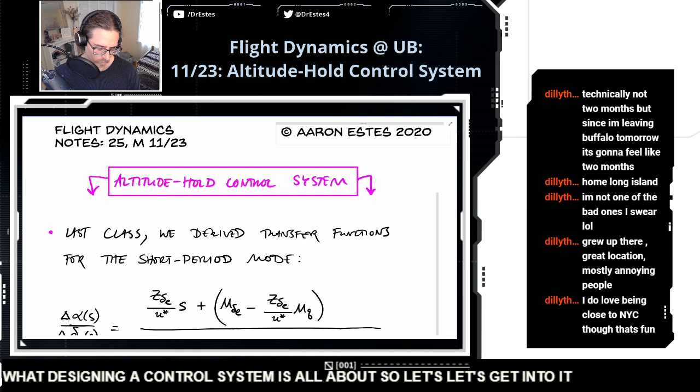So let's get into it. We have some transfer functions for the short period mode that we got last Wednesday. We have a second order model for the short period mode. The short period mode is where the nose is pitching up and down. It damps out very quickly. Even for a Boeing, this mode only lasts 10 seconds when you excite it until it settles out. But it's kind of this annoying mode, the nose pitches up and down. And so, using that model for the short period, you can make some transfer functions that relate.

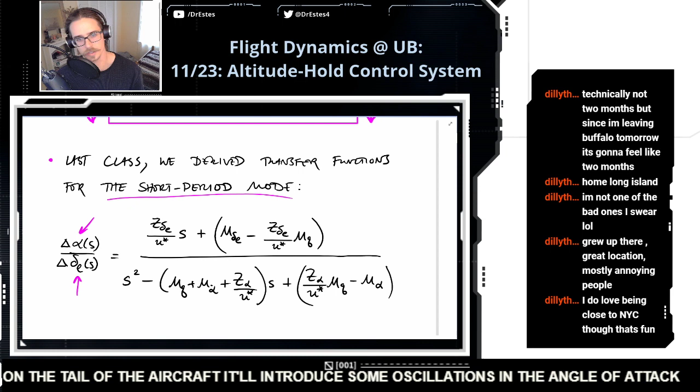Number one, this relates the angle of attack to the elevator angle. So if you perturb that elevator on the tail of the aircraft, it'll introduce some oscillations in the angle of attack. That's what this transfer function is all about.

And there's a second transfer function we get from that model. Q is the pitch rate, so that's just the rate at which our pitch angle changes. And we have a transfer function for that one as well. If you deflect the elevator, it'll introduce some oscillations in your pitch rate.

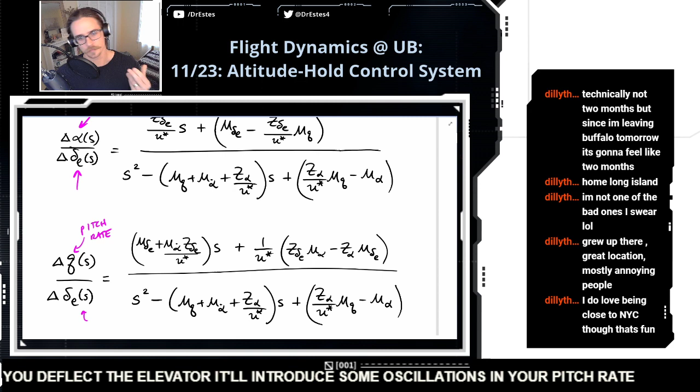Okay, so we are going to use these transfer functions for the controller that we're going to design. So these will be like the backbone, the model for our aircraft.

Okay, so we're going to use these to design an altitude control system. So what is an altitude hold control system? And just from the name, you probably already have a good idea.

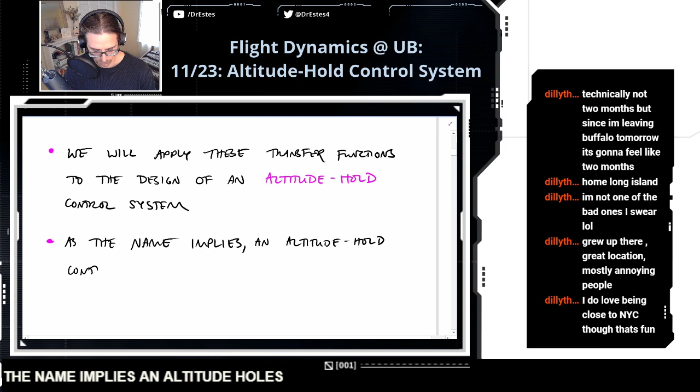Okay, so as the name implies, an altitude hold control system maintains the altitude of an aircraft, despite perturbations from external forces.

All right, so it's like, all right, we want to cruise at 40,000 feet, and then we lock in the altitude hold control system. So, if there's any perturbation, external force, an unexpected gust of wind, this control system is going to automatically bat those perturbations away and maintain the altitude.

Or if you just adjusted the stick and moved the altitude, this control system would move it right back to the set point.

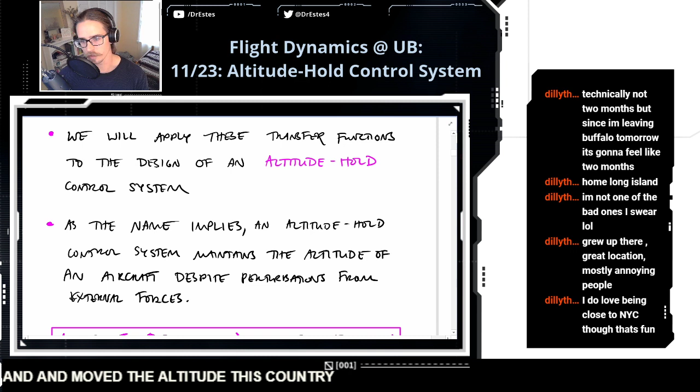Okay, so we're going to make a transfer function for this. So I'll show you what I mean. If we're doing level non-turning flight at constant velocity, so just imagine you're flying straight up in the sky.

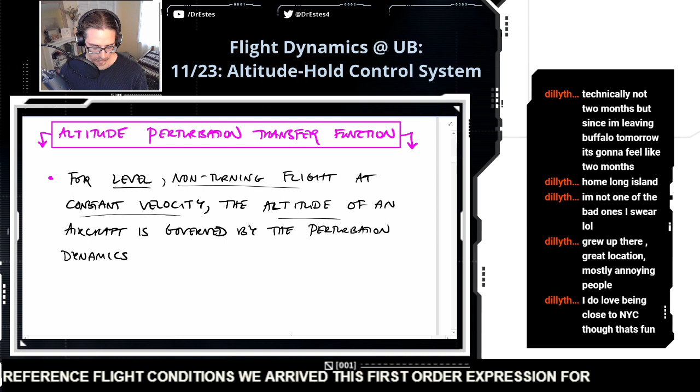Earlier on in the course when we talked about reference flight conditions, we derived this first order expression for perturbations in altitude. Here it is. So delta H dot. This is perturbations from some reference altitude, 40,000 feet, 20,000 feet, sea level, whatever.

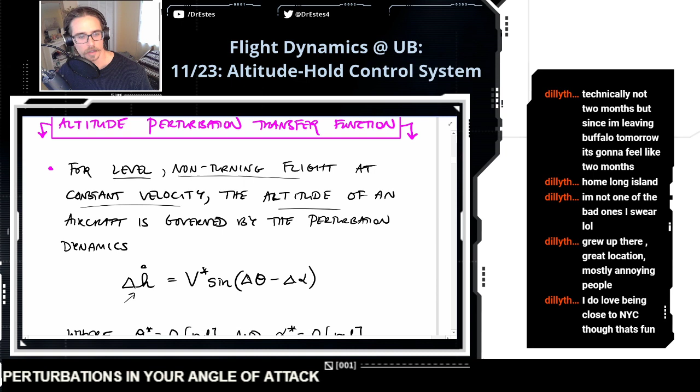But this is going to be equal to your nominal speed, V star, times the sine of changes in your pitch angle minus perturbations in your angle of attack. And this model is assuming that the nominal pitch angle and nominal angle of attack are set equal to 0 radians apiece. So here's a little schematic here.

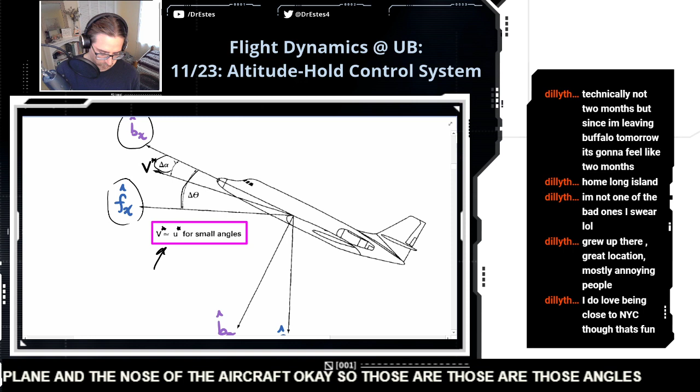Okay, so those are those angles, and this figure is from the Nelson textbook, but when these angles are really small, so the velocity vector projected onto the BX axis, maybe I'll do that a different color. We know that that is U star.

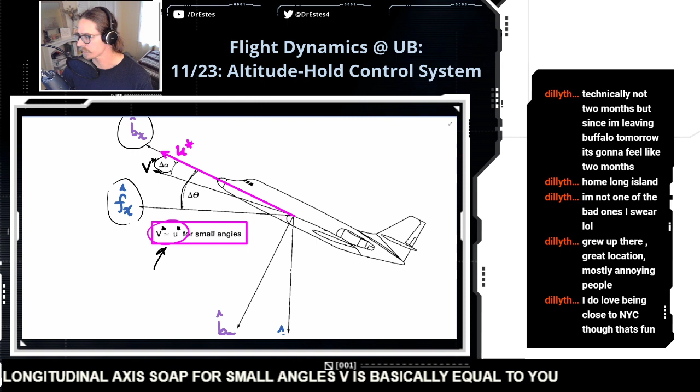That's the projection of the inertial velocity onto that longitudinal axis. So for small angles, V is basically equal to U. So we're just going to say that V equals U.

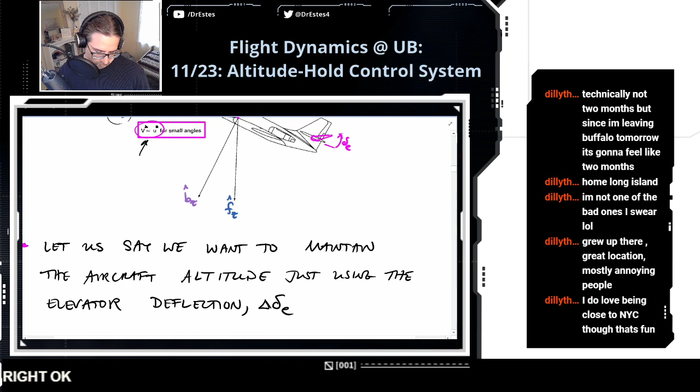Okay, now this altitude hold control system, we're going to try to achieve this purely with the elevator. So we're just going to try to automatically have the elevator adjust so that altitude is maintained. That's what I'm saying in this sentence here.

So in this case, we're going to need a transfer function where the altitude perturbation is the output of the transfer function, and the elevator angle is the input to the transfer function.

All right, so I'm going to define this transfer function here. I'm going to use some notation for transfer functions. When I use capital G, that's going to represent a transfer function. And then I'm going to try this, I haven't done this before, but I kind of like it. I'm going to have a superscript that represents the output and a subscript that represents the input.

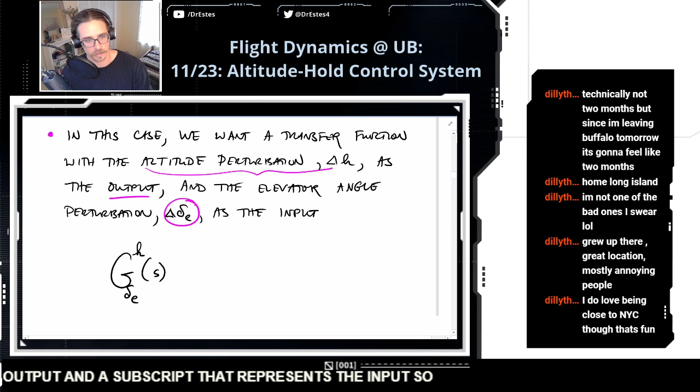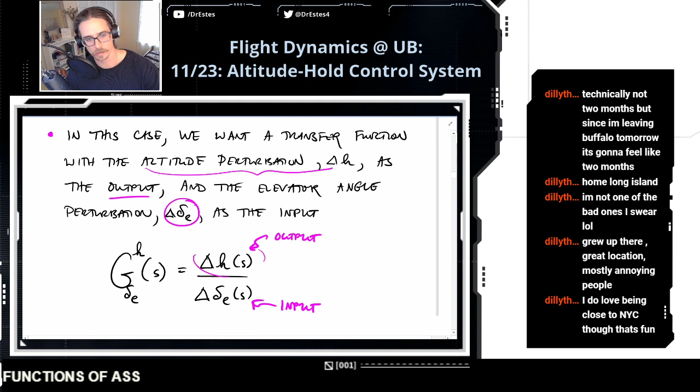So our transfer function, a function of S, this is going to have as the output our perturbation in altitude divided by a perturbation in the elevator deflection. So if you remember, a transfer function is the ratio of your output to your input in the Laplace domain. That's why these are functions of S, the independent variable of the Laplace domain.

Okay, so up above, we have a differential equation for the altitude as a function of time. Let's get it as a function of S to get this transfer function. All right, so here's our differential equation for the altitude.

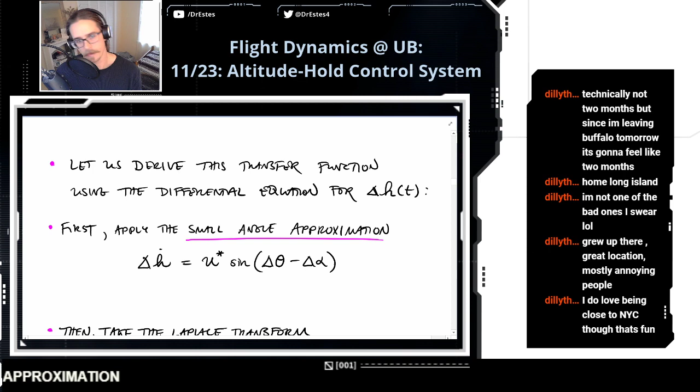First, I'm going to apply the small angle approximation, meaning the sine of a small angle in radians is equal to the angle itself. Maybe we should put an approximate equals here, but this approximation is very good up to like 10, 15, even 20 degrees. Replacing a sine just with the angle itself does a very good job. So we're assuming this difference between the angles is a small number.

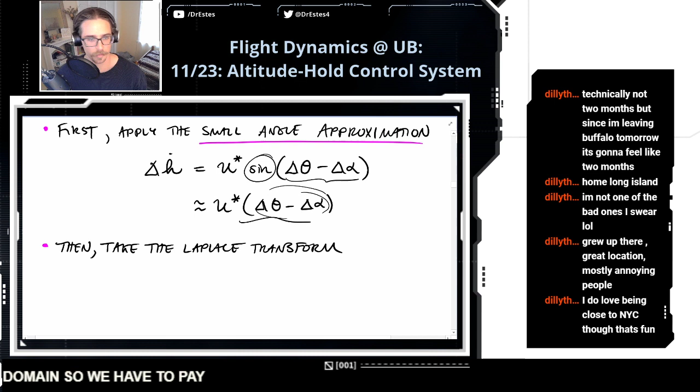Now, we're going to go into the Laplace domain. So we have to take the Laplace transform of this differential equation. So we got the left-hand side, and we take a Laplace also of the right-hand side.

So whenever you take the Laplace transform of a derivative here, you have to multiply by S. And we're assuming the initial conditions are 0. That's the definition of a transfer function. So you won't see any initial condition terms that usually come up when you take the Laplace transform of a derivative.

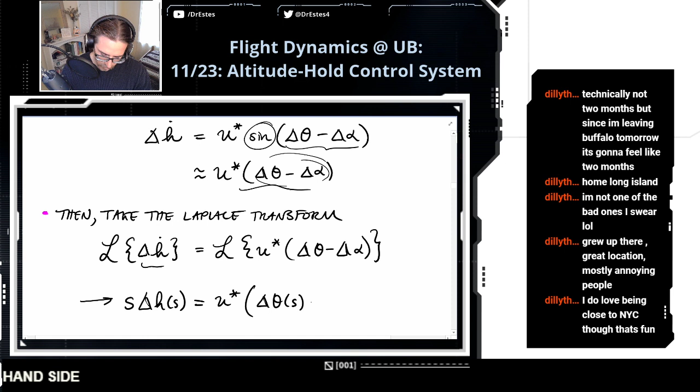Okay, now we're going on to the right-hand side. All right, and then let's divide both sides by S just to get delta H by itself.

Okay, so now this is our perturbation in height in the Laplace domain. But we want the transfer function that relates this height to the elevator angle. So to do that, we're going to divide by the elevator angle in the Laplace domain. And that's going to give us our desired transfer function. So check this out.

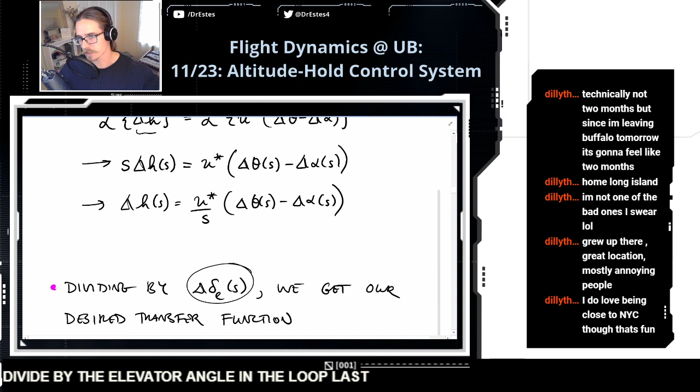That's going to be, I'm going to bring this delta E inside. Voila. So actually we see this transfer function that we wanted relating the altitude to the elevator angle. It's a function of two other transfer functions: how the pitch angle changes with the elevator angle and how the angle of attack changes with the elevator angle.

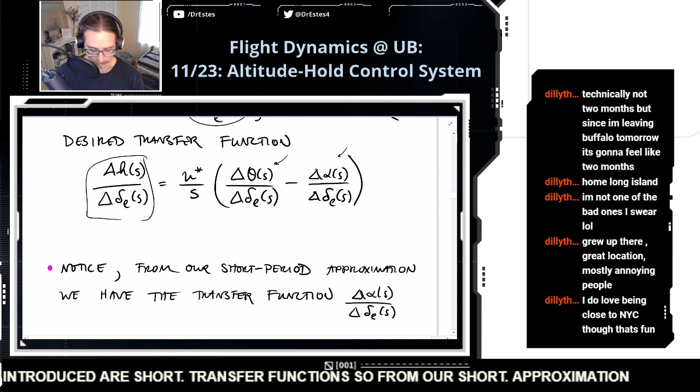Now this brings me back to the very beginning where we introduced our short period transfer functions. So from our short period approximation, we already have the transfer function for the angle of attack related to the elevator angle, right? That's all the way up here. Boom, it's this second order transfer function, and we have it. Now, what about the other transfer function that's in here? We have this one, but what about this?

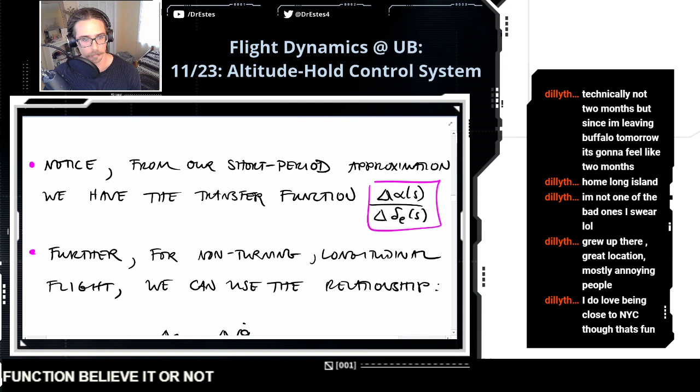Well, it turns out we also have that transfer function, believe it or not, because for non-turning longitudinal flight, just going straight, we have this relationship where this angular rate about the body y-axis is equal to the time derivative of the pitch angle. So this relationship isn't always true. It's just for this special case where you're flying straight, you're not turning, but you accommodate some pitching.

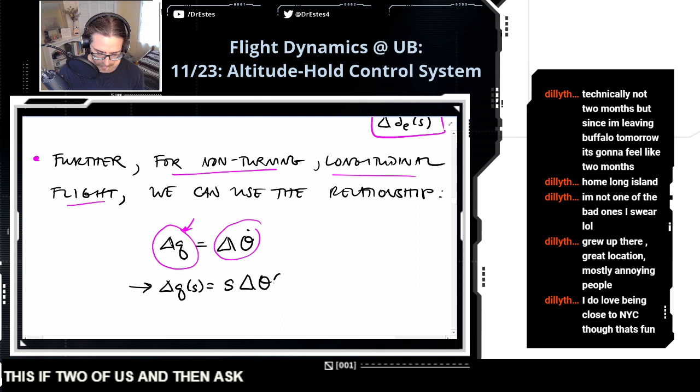So if we take the Laplace transform of this, we have Q of S and then S times delta theta of S. So I have the S out in front because I'm taking the Laplace transform of a time derivative. So if I just isolate delta theta of S, I have to divide this delta Q of S by S. Okay, now if I divide this by the elevator angle, oh wait, I should have this delta here. Okay, so this is that transfer function we need.

It turns out it's 1 over S times this transfer function. And we have this one from our short period approximation. Okay, and then I'm just writing that out here.

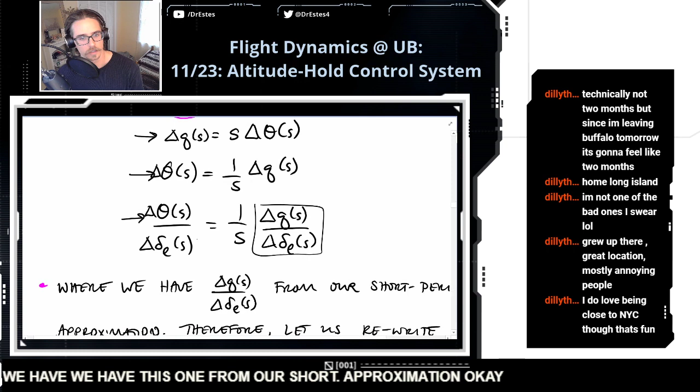So then our altitude transfer function, made up of these two other transfer functions, it looks like this. It's our aircraft speed divided by S times 1 over S delta Q of S over our elevator angle, all right. So we have this transfer function totally defined because we have both of these up above.

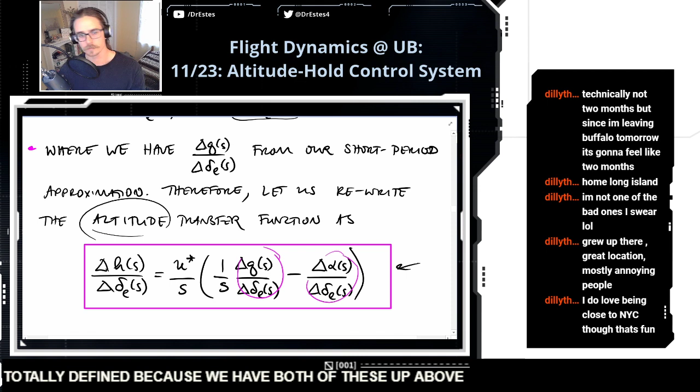Now, I don't want to get into this too much, but our aircraft equation of motion, the longitudinal equation of motion, we call it, has 4 states. It's a 4th order model. And then we broke it into 2 second order models. Like we have the short period model, which we're using here. And we also have the phugoid or long period model, which I haven't used here. Now, the altitude of an aircraft actually depends on all 4 longitudinal states.

But really, I'm only using the short period model to model the altitude of the aircraft. So it seems like this is a common thing to do, to use a simplified model, design a control system around that, and then apply it to a more complex system. There's some things I'm still sorting out related to that, but we're going to proceed in this fashion, assuming that the altitude is designed around the short period model. And then I want to apply our control system to the full model once we're finished. We might see some performance degradation. In fact, I'm expecting it.

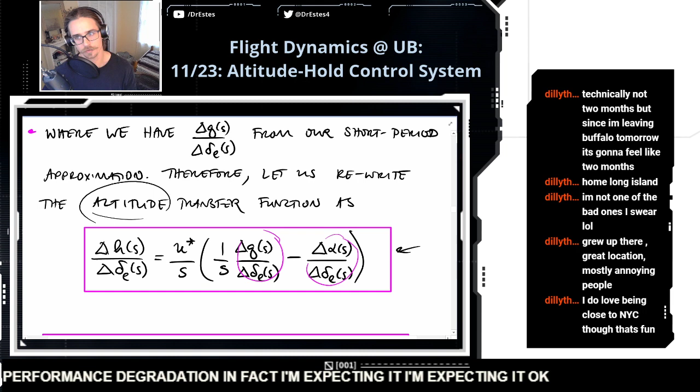Okay, so we have this transfer function. Now, I want to get another transfer function as well, and this is for the elevator actuator. Because when you deflect the elevator, that's usually done by some kind of servo mechanism, whether it's a ball screw or I don't know, but it's going to be driven by a motor or some hydraulic system. We're going to assume that the elevator is controlled by some kind of servo motor.

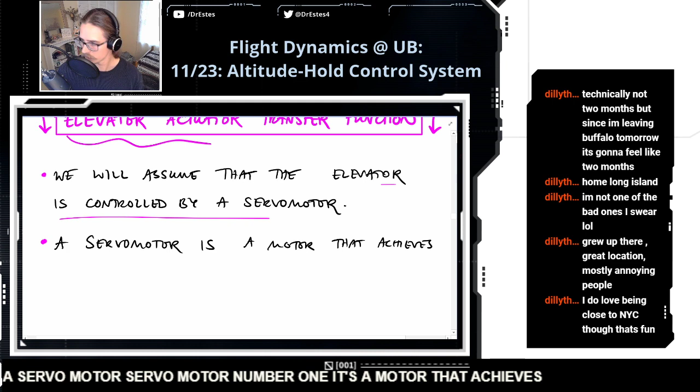So what's a servo motor? A servo motor, well, number one, it's a motor that achieves angular position control via feedback from a rotary encoder.

So it's a motor that is used for position control. I want to drive the elevator to some fixed angle. A servo motor achieves that by using some feedback. It has a rotary encoder to measure the angular deflection, and then it can go to a specific orientation.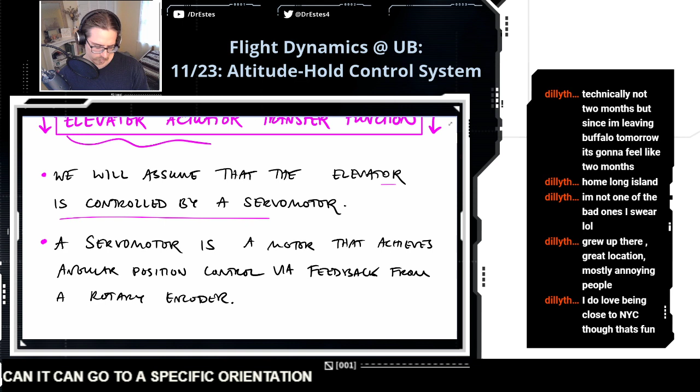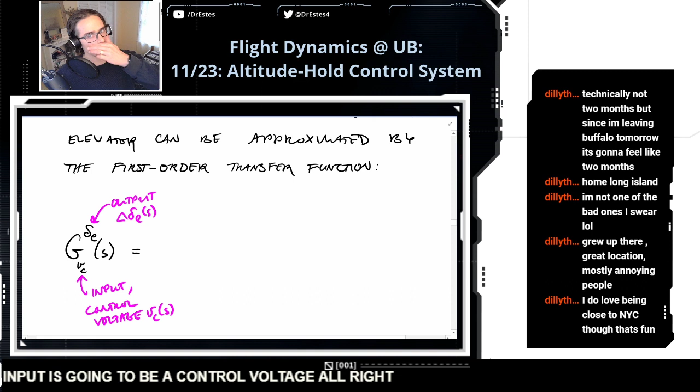Now, the dynamics of this servo actuated elevator can be approximated with a first order transfer function. So all this transfer function means, well, let's write it out. The output of this transfer function is going to be the deflection of the elevator. The input is going to be a control voltage. We supply a voltage to the servo motor, and that voltage corresponds to some deflection of the elevator. So we got the output divided by the voltage, and this is often a first order relationship.

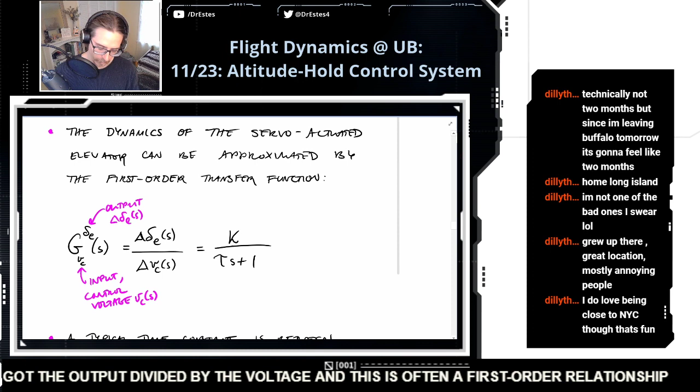Now, the way a first order system works, you guys know this. That means over time, if I provide a step voltage input, let's say I want my elevator to deflect 2 degrees or something, it's going to not immediately go there. Nothing in life works that way. Rather, it'll gradually go up there, kind of in this exponential fashion. And the speed at which it gets there can be quantified with the time constant of the servo motor.

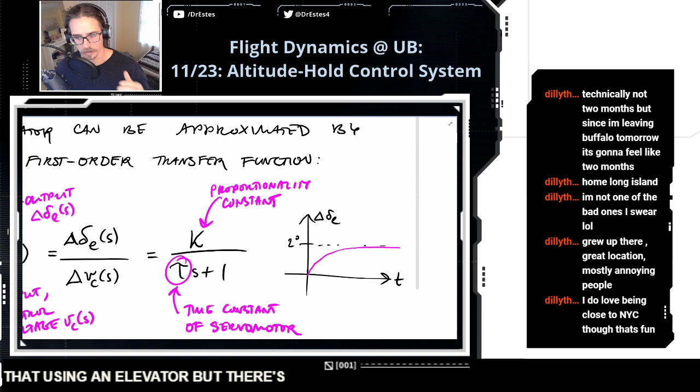All right, and then there's this proportionality constant. Don't worry too much about that. The main takeaway here is that if you're on an aircraft, we're working to achieve altitude control, to just hold our altitude. We're going to do that using an elevator, but there's some lag in how the elevator moves, just because it takes time to power up the servo motor and deflect the elevator.

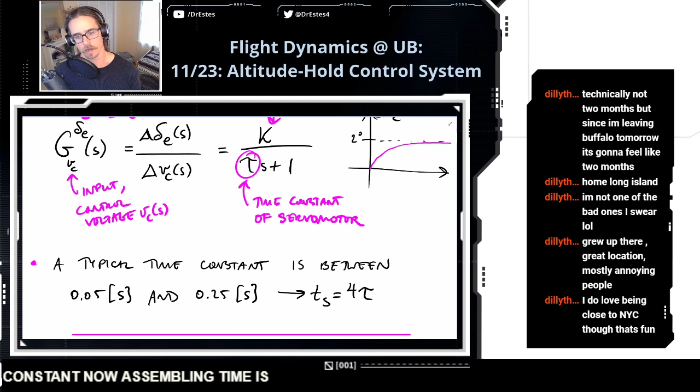So, okay, how fast is this? A typical time constant is between a 20th of a second and a quarter of a second. And remember, the settling time is defined as 4 times the time constant. Now, the settling time is, I would think of that as how long it takes for the elevator to actually get to where I want it to be. So that means we're looking at, it takes a quarter of a second up anywhere up to like a full second.

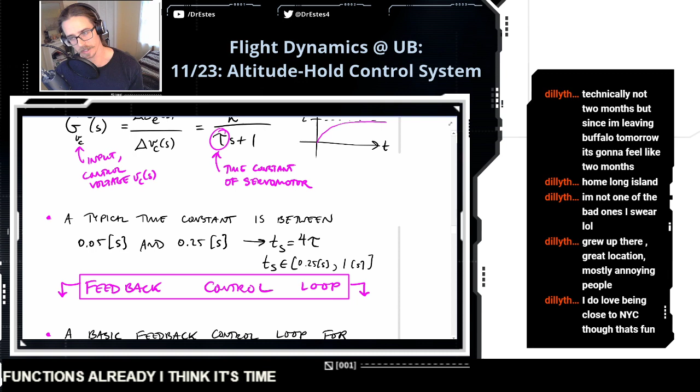All right, so we're going to model that realistic little bit of lag in there. Okay, so we have a couple transfer functions already. I think it's time to start introducing the feedback control loop, talking about some of these basics. I think many of you probably haven't seen feedback control formally, so we'll go through it.

So, okay, a basic feedback control loop for the altitude control system is as follows. This isn't the only feedback control loop you could use, but this is probably the most basic. So I'm going to start filling this in little by little. This is called a block diagram for obvious reasons. And each of these blocks, usually you place a transfer function in there. So let's start over on the right-hand side.

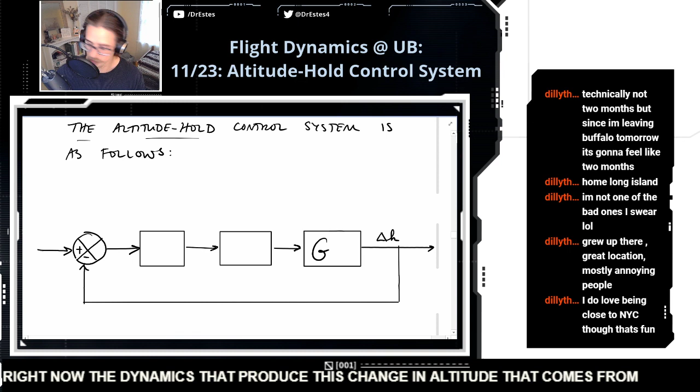Okay, so the net result coming out, the output is going to be delta H, a change in altitude. Now, the dynamics that produce this change in altitude, that comes from this transfer function that we derived at the beginning. It takes as an input the elevator angle, and it outputs our change in altitude. So the input to this transfer function is our perturbation in the elevator angle.

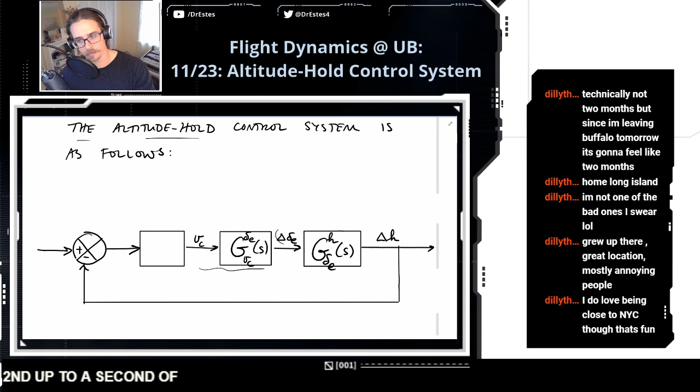So you change the elevator, it changes the altitude. Okay, now this brings us to the second transfer function, because this elevator angle, well, how does it get there? We provide a control voltage to the servo motor, and then by means of a transfer function, we get an elevator angle response. So this transfer function models that time delay of like a quarter second up to a second of that elevator getting to where we want it to be.

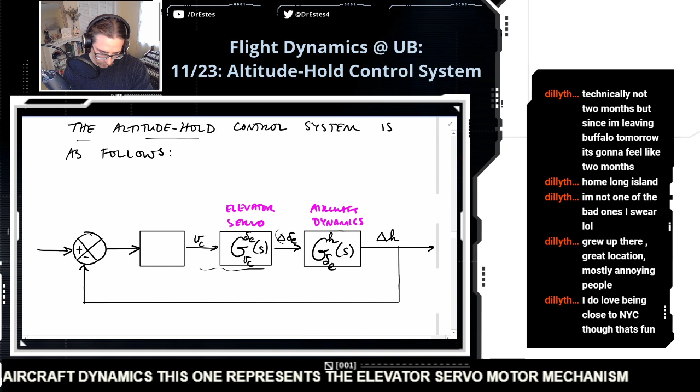Okay, now this brings us to this final block, which we haven't played around with yet, but this is our controller. Wait, okay, so let's label these. This one represents the aircraft dynamics. This one represents the elevator servo motor mechanism. This one is our controller. So what does a controller do? Actually, let's come back to that. I want to come back over here to the right. So this loop, this is our feedback loop.

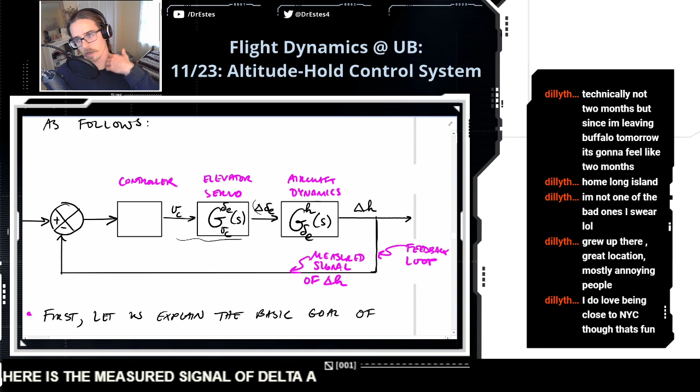What it represents is a measurement of the aircraft dynamics, which we feed back to process with our controller. So what's traveling along here is the measured signal of delta H, our perturbation in altitude. We're going to measure it and then feed it back. So it comes back over here, and I believe the technical name of this thing is a comparator.

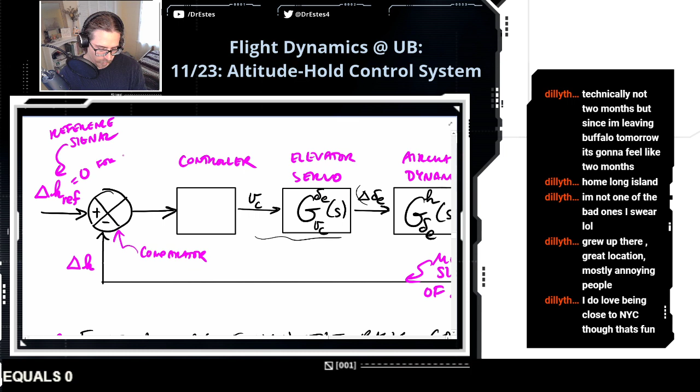But what it does, we're going to have some reference or some desired change in altitude. I'll call it delta H ref. So what comes in here is delta H, what we actually measured. And we compare it to a reference signal. The reference signal represents the desired dynamics - this is what I want to achieve. So for an altitude hold control system, I desire to have no perturbation in altitude, so that would actually equal 0 for altitude hold.

So what comes out of this comparator? An error signal, which we'll just call lowercase e. And what is e? E is the difference between your reference signal and your measured signal.

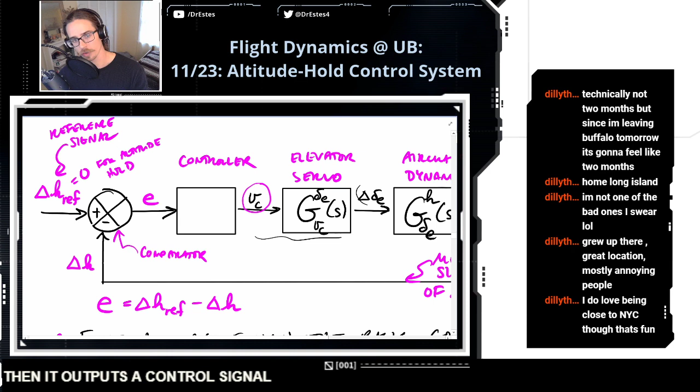Now this brings us to the controller, because the controller is just a transfer function, and it takes in the error, the difference between the desired behavior and the actual behavior, and then it outputs a control signal, which is the control voltage for our servo. And it chooses the voltage in such a way to correct the error, to make the error go to 0, so that we approach the desired behavior.

So let's put this transfer function in here. The input is the error. The output is the control voltage. So error signal, control voltage, elevator deflection.

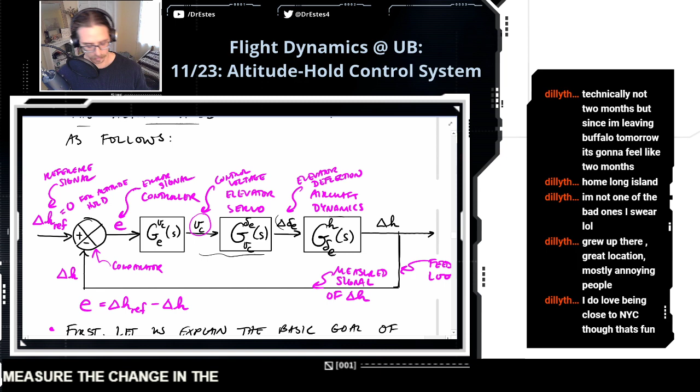So that's not too complex, right? You adjust the elevator, that changes the altitude. I measure the change in the altitude. I compare that change to a desired change, which is actually no change. I'm going to get a difference. I feed that difference to the controller. That provides a voltage to my elevator servo. And then we actually change the elevator, and that adjusts the altitude again. And it just keeps going over and over and over.

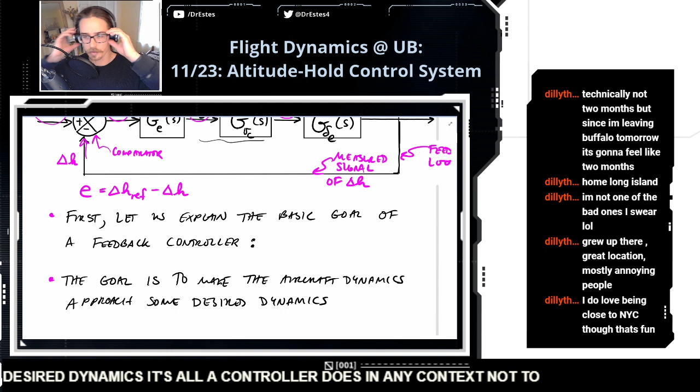Okay, so the basic goal of a feedback controller. The goal is to make the aircraft dynamics approach some desired dynamics. That's all a controller does in any context, not just aircraft, but anything. A controller makes something behave the way you want it to behave.

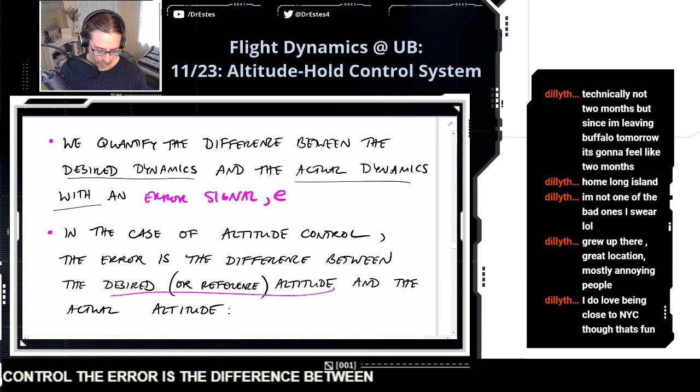So we quantify the difference between the desired dynamics and the actual dynamics with an error signal. We just called it lowercase e, right? And in the case of altitude control, the error is the difference between the desired or reference altitude and the actual altitude. Actually, I should have said altitude perturbation, because this is a linearized model about some fixed altitude already. So we have the desired altitude perturbation, and then we have the measured, the actual.

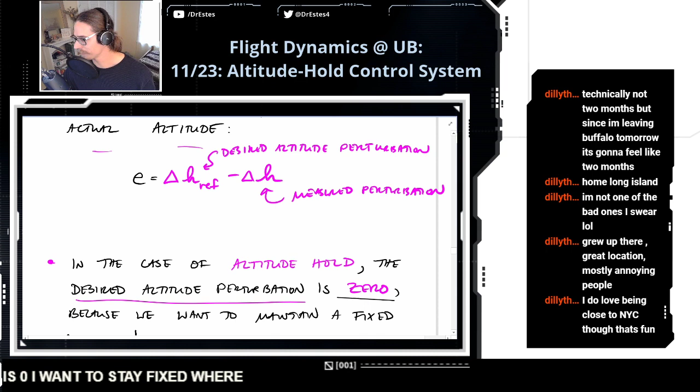So in the case of altitude hold, like I said earlier, the desired altitude perturbation is 0. I want it to stay fixed where I left it. So the error signal, it's actually pretty simple. It's just minus delta H.

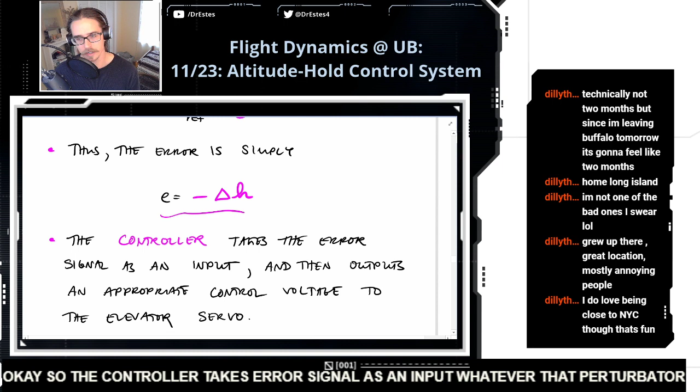So the controller takes the error signal as an input, whatever that perturbation in height is, and then it outputs an appropriate control voltage to the elevator servo. So a controller is simply a transfer function, and it's usually implemented digitally on a computer that processes error measurements and then outputs corrective control commands.

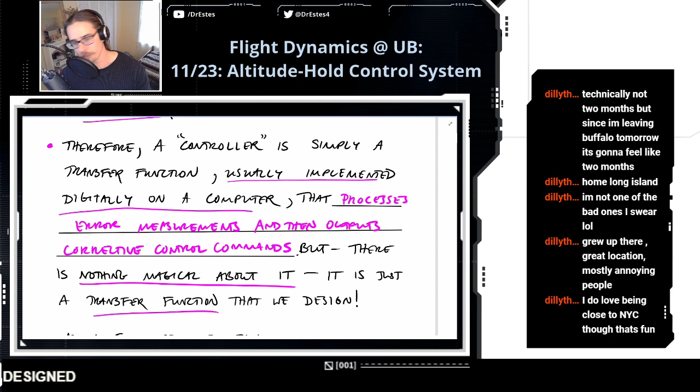But yeah, there's nothing magical about a controller. It's just a transfer function. I say this because people sometimes are like, what is a controller? They think it's some complex AI or something. But as we get more into this example, you'll see in most cases a controller is just a transfer function that we design, and it has an input and an output, and however the dynamics of that transfer function are, that's how the controller behaves. So there's no magic to it.

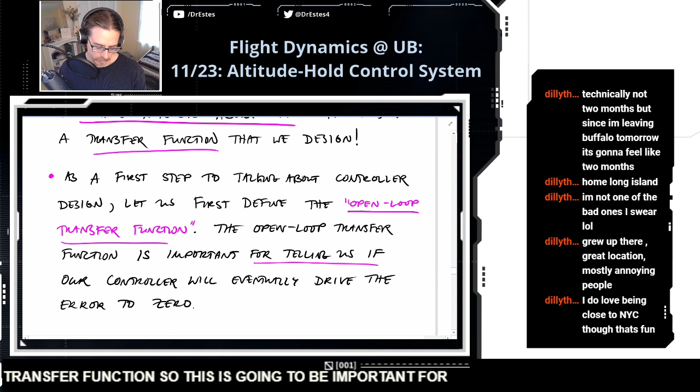Okay, let's introduce some controller terminology as we get into this altitude hold thing. The first thing we're going to define is the open loop transfer function. This is going to be important for telling us if our controller will eventually drive the error to 0. Meaning if we get hit with a gust of wind and our altitude increases, is our controller going to bring us back to our original altitude? Well, the open loop transfer function will tell us that eventually. So what is it?

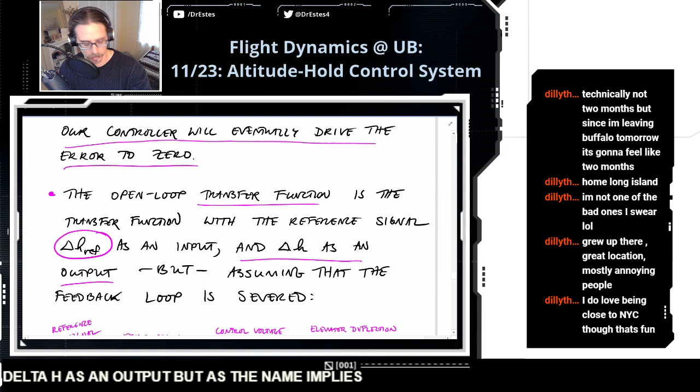It's a transfer function, so it's going to have an input and an output. It's going to have delta H-ref as an input, and delta H as an output. But as the name implies, open loop, we're going to assume that the feedback loop is severed. So we cut it, the measurement doesn't come back in here anymore. So we could just assume that there's just a 0 coming into this channel. Just assume the feedback is 0.

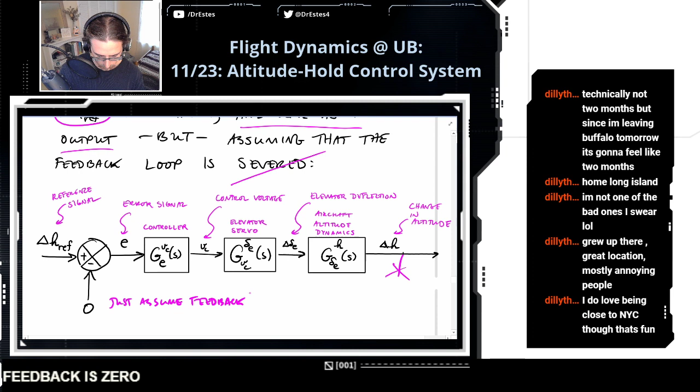So the way we're going to develop this transfer function is we're just going to work backwards from the right. So delta H of S is going to be equal to this transfer function, our aircraft altitude dynamics transfer function, times our elevator angle perturbation, right? So that's just using this little block right here.

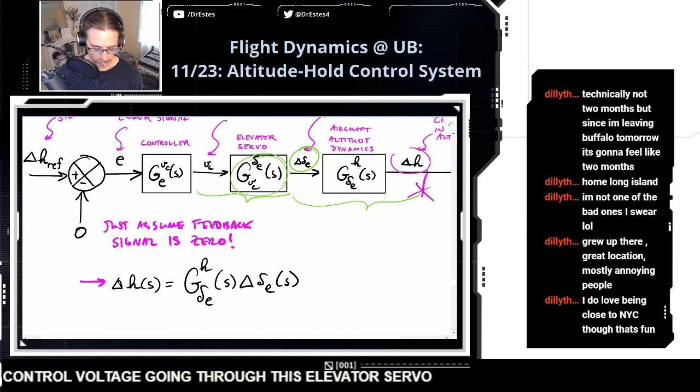But then our elevator angle, where does that come from? Well, that comes from the control voltage going through this elevator servo transfer function. So we're going to keep working backwards here. I'm going to keep this transfer function here, but now for my elevator angle, I'm going to use this other transfer function that takes an input as the control voltage. Its output is the elevator angle. So now I'm multiplying by that control voltage.

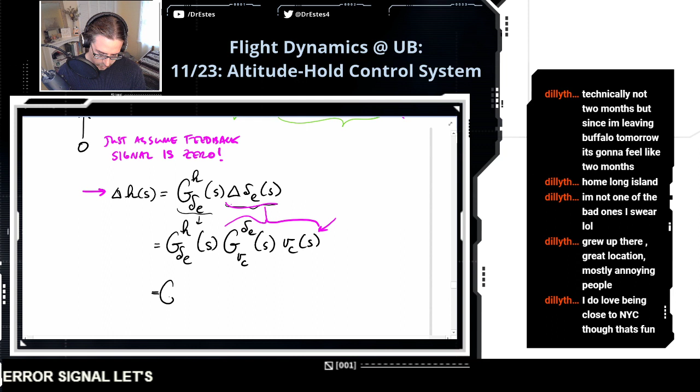Okay, and now we're going to go back, peel back another layer like an onion. Because where does the control voltage come from? Well, the controller decides what the control voltage is based on the error signal. So let's just put everything in here. So you have this cascade of transfer functions, just one feeding into the next. So this takes the error signal as an input and it outputs the control voltage. And so now I have this at the end.

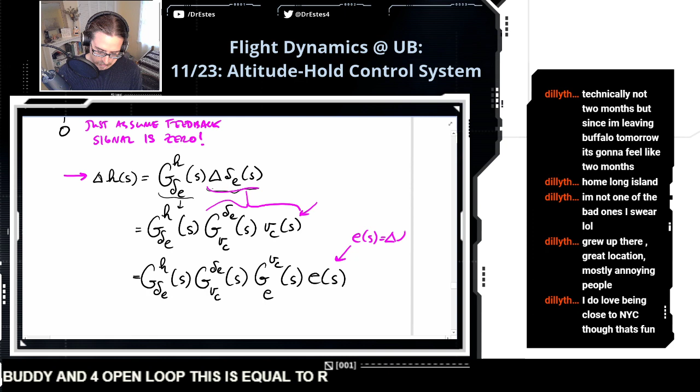And for open loop, this is equal to our reference signal. I'll show you on the diagram in a second. Zoom out a little bit here. Because you see, here's our error signal over here. Well, what does the error signal come from? Well, it's the difference between our reference signal and the feedback signal, but we cut that feedback signal for the open loop. So it's just 0 coming in here. There's nothing coming in.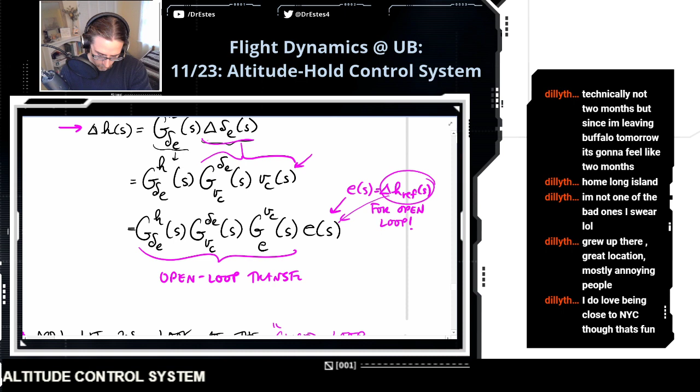So that means the error is basically the same as that. So I could also put that variable in here. Anyways, this right here is the open loop transfer function for our altitude control system. And when you're doing control systems, the open loop transfer function keeps popping up over and over again.

Chen says, I'm here to review some road vehicle dynamics and say hi. Hi, Chen. Glad to have you here. Chen's in our road vehicle dynamics class.

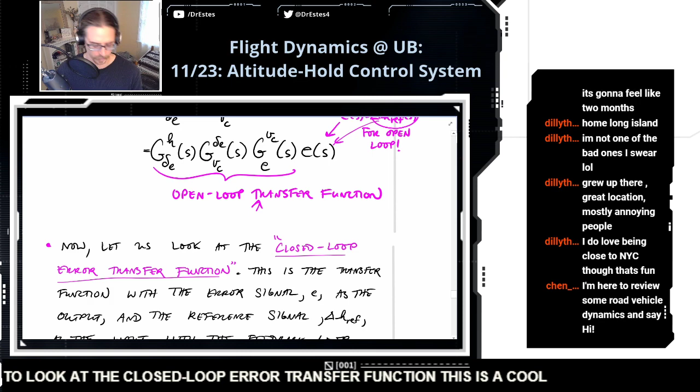Okay. So we'll come back to this transfer function. But now I want to look at the closed loop error transfer function. This is a cool transfer function. This is the transfer function with the error signal as the output and the reference signal as the input. As opposed to the open loop transfer function, we're going to assume that the feedback loop is closed. All right, let's just get into this transfer function, and then I'll tell you why I think it's so cool.

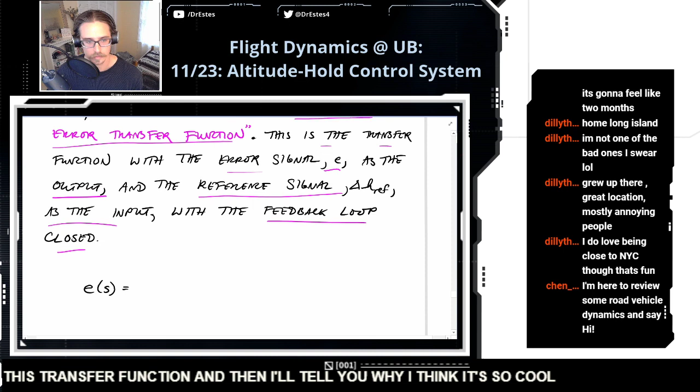Okay, so we're gonna build this the same way. So what is the error? It's the difference between my reference signal, this reference altitude, and my measured altitude. So I'll replace this here. Here, for delta H, I'm going to use our open loop transfer function. That actually, we get to recycle it here.

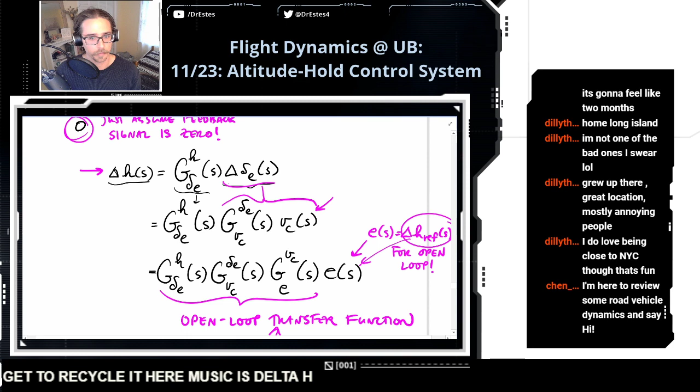Excuse me. Because delta H, as we have up here, is related to our error function via the open loop transfer function. Let's put it in here. So I'm going to put these three transfer functions cascading together. This is our open loop transfer function, times our error signal. So let's point this out again. Our open loop transfer function shows up.

You know what though? Because this takes a lot to write each time, how about we make a definition? We're going to call it G open loop. It's going to make us all happier.

Okay. So look, we got this error term on the right and this error term on the left. Let's gather all the error terms together on the left. Okay, so we're going to have 1 plus our open loop transfer function times E is going to be equal to our, the only thing left on the right hand side, that reference signal. So now I'm going to get this error transfer function. Maybe I'll call it G. The input is our reference signal. The output is the error. So E of S over H ref of S.

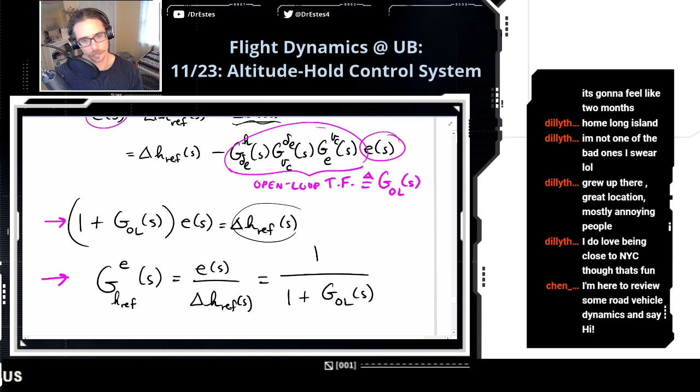Okay, so why do I think this transfer function is very interesting and important? This tells us for any reference signal, this gives us the dynamics of the error between our desired and our actual dynamics over time.

So let's make a little graph here. Let's say this is time, and let's say this is my desired altitude over time. So we're ascending, we're climbing up to some other altitude.

So the way a controller works is, right when you introduce a change in your reference, the controller has to kind of catch up, and it gets closer and closer to the reference over time, hopefully. We'll go over different types of steady state error, but ideally you would eventually catch up and align with this reference.

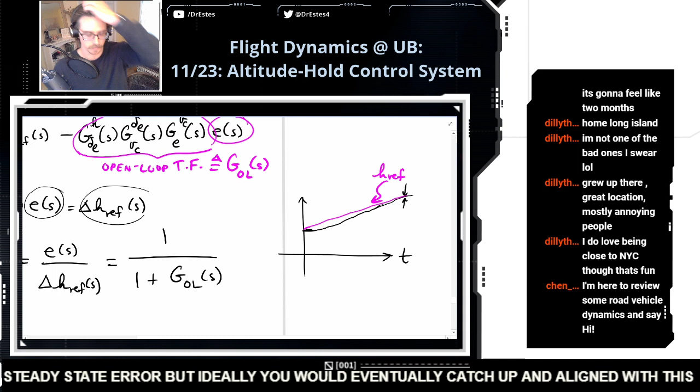So the error is the difference between these over time. So this transfer function that we just derived, if we do this error over time, looking at this picture above, what is the y-axis on that graph? I'm plotting perturbations in altitude. The pink is the reference, and the dark one is the actual, and the error is the difference between.

So if you plot this difference over time, that's what our transfer function is about. The error, it looks like it started at 0, then it grew, then it exponentially decayed back down to 0. This transfer function is going to tell you all about these dynamics.

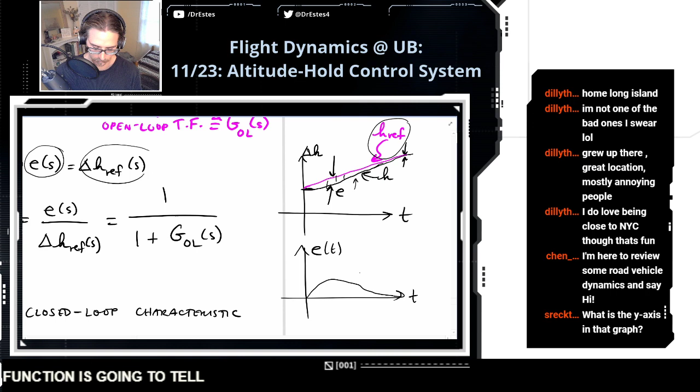And in fact, when you design a controller, the way controller design works is you, in advance, pick what you want these dynamics to be, and then you design a controller such that that happens.

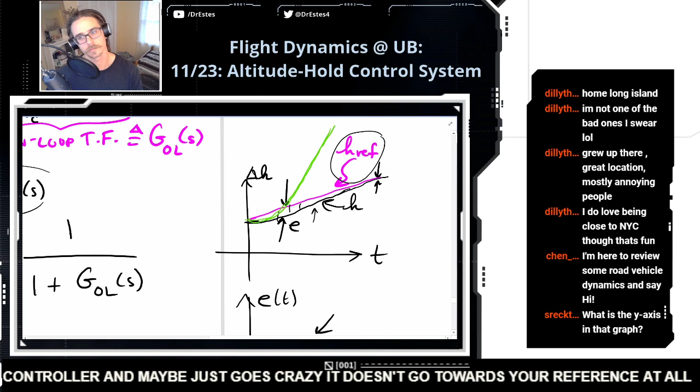So the closed loop characteristic equation. Okay, what can sometimes happen is you design a controller and maybe it just goes crazy. It doesn't go towards your reference at all. That can happen if we're not careful when we design a controller.

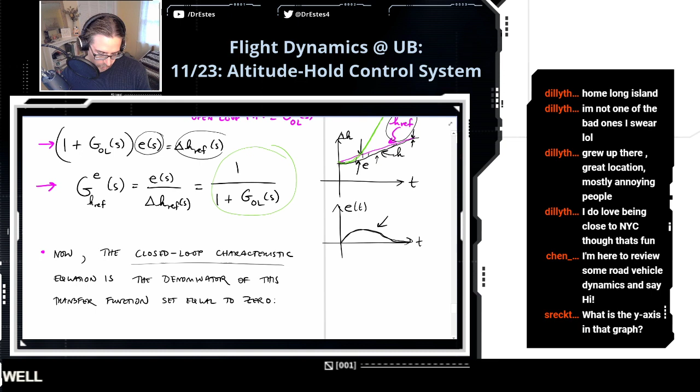So what's going to tell you that is the stability of this transfer function. If this closed loop dynamics transfer function is unstable, you're never going to approach the reference signal, you're going to diverge to infinity. So how do I know if it's stable or not? Well, you look at the characteristic equation and you look at the roots of the characteristic equation.

Now for a transfer function, the characteristic equation is the denominator. The closed loop characteristic equation is the denominator of this transfer function when we set it equal to 0. So we have 1 plus G open loop of s equals 0. That's our characteristic equation, and we have to make sure this is stable, number one, when we design our controller.

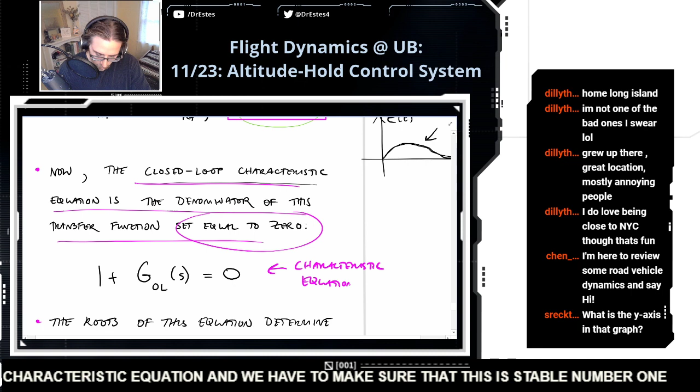So the roots determine the system's stability and the transient characteristics, like settling time, if there's going to be oscillations in the response. So yeah, first and foremost, you have to design a controller that's stable.

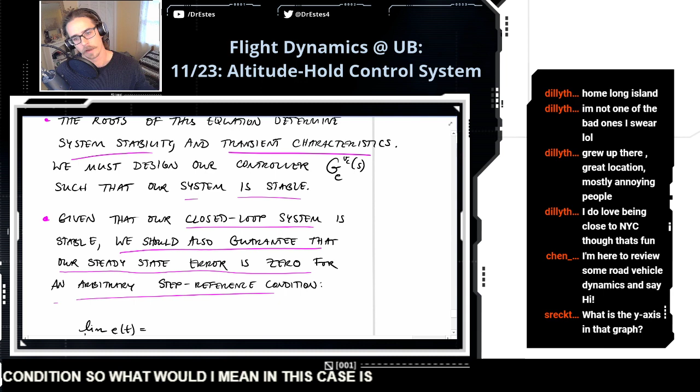Okay, so let's say given that you design something that's stable, you should also guarantee that the steady state error is 0. That would be ideal for an arbitrary step reference condition. So what I mean in this case is, if I'm going to a specified altitude, is the control system going to bring me exactly to that altitude, or is it going to overshoot it? Is it going to undershoot? And we're going to use the final value theorem to do that.

So you want the limit as time goes to infinity of the error to be 0. And that is equal to the limit as s approaches 0, s times e of s. So this is the final value theorem, or rather, the limit as time goes to infinity, that, here we go.

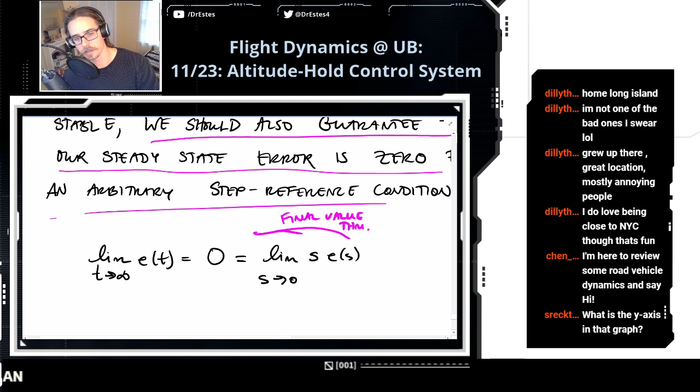And you know what? We're just going to leave it here. But next time, we're going to get into more specifics. So we'll bring back our transfer functions from the beginning, we'll put in some actual numbers, and it'll be a little less just theory, and more applied to this specific altitude hold problem. So when we come back after Thanksgiving, when you're loaded up on turkey, we're going to revisit this.